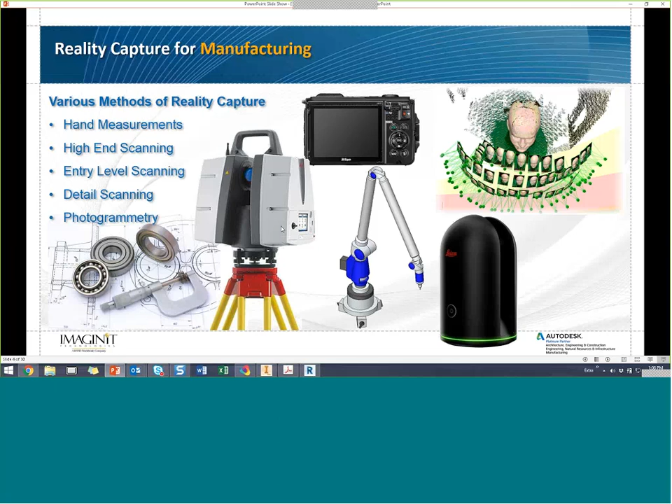So there's all types of methods of going out and capturing reality now. And the process that you choose really does become a factor of the company that you work for. How much can you afford for it? How much time do you have? How much skill or expertise do you want to designate towards this particular process? Well, I have a question for you. This is a question I ask a lot these days. Why has manufacturing been so slow in adopting reality capture?

I'll give you my take on that. Primarily, right off the bat, when I talk about manufacturers, the first question they ask me about laser scanning is how accurate is it? And then we start talking about time of flight and how long the laser is going to and from the object and how far the object is from the scanner, and we start talking about plus or minus a full millimeter at such a distance away from the scanner, and that just turns some manufacturers off right there. If it's not going to be 100% accurate, I don't want anything to do with it.

Well, nowadays, accuracy is amazing with laser scanners. It's never going to be 100% perfect. It never will be, but the accuracy is incredibly detailed now at objects that are roughly close to the scanner. The other side of it is time, skill, difficulty. Scanning, I think, has been perceived for a long time as a dedicated science. You need a surveyor to go out and read the instrument and to program it in correctly. And it has taken time in the past, putting people in the field for multiple days to collect data. It's not the case anymore.

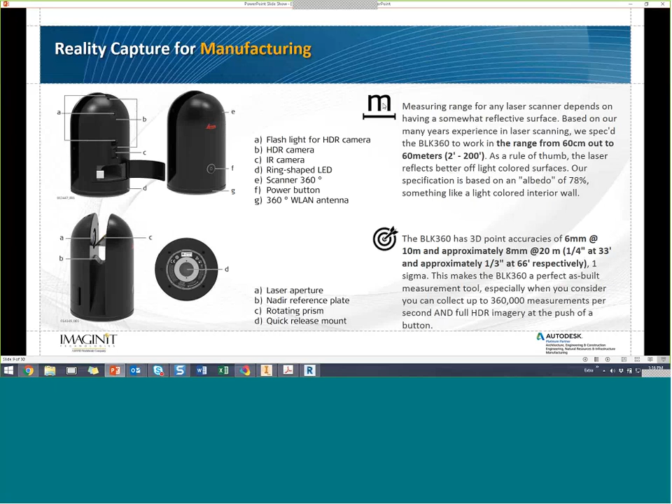But it basically sits on the top of a tripod or on the ground, and it spins around, takes a full 360-degree spherical image, and shoots the point clouds at about 360,000 points per second. Colors those points based on the spherical photo, and delivers you, I think, a very high-end point cloud scan in very little time. I'll mention this now, and it's probably on another slide, but at a medium density scan, this thing will complete a scan in right at 3 minutes.

Which is very nice for a scanner. I mentioned the price point is around $20,000. That is for the basic scanner. If you want to spend a couple of thousand dollars more, you can get the Mission Expansion Kit, which is the carry case, the tripod, the cover, the battery, extra batteries. Always great to go in the field with extra batteries.

So there are some additions, but this particular kit represents what we think goes in the field most of the time, every day with the BLK 360 product. This kit is small enough and light enough to carry through airport security. It easily goes in the overhead bin on an airplane.

I was at a customer site a couple of weeks ago where they have a full high-end, very expensive laser scanner. It's a construction firm. But they just got a few of these BLK 360s. Now, no one wants to touch the large scanner because it's so bulky and it takes so much time to get the thing into the field.

They want the quick and easy to use BLK 360 because it's so lightweight. They can throw it in the trunk of the rental car, go to the plant, take the scans, come back to the office, be back in the office the same day. So it really is breaking a lot of ground in the scanning industry.

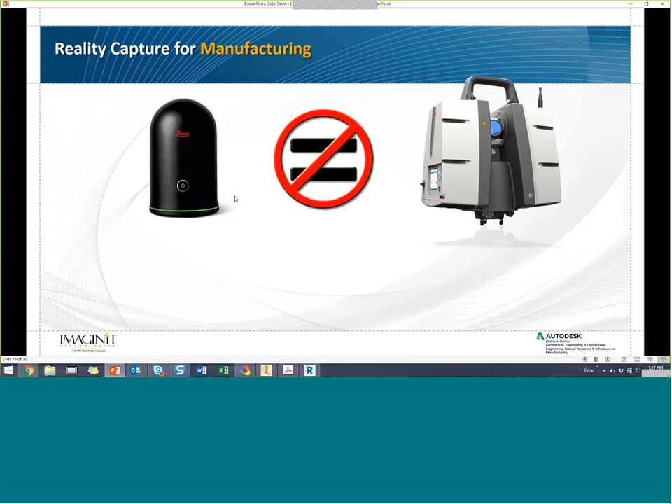Now listen, I absolutely need you to pay attention to this. These things are not equal. There's quality in the scan. You're going to see a much higher quality scan from the P series, the high-end scanners. The fidelity is going to be much greater. There'll be so many more options built on the high-end scanner.

The scans are great. They're reliable. They're roughly the same resolution. But there are a few issues. I'll be honest, the BLK has a hard time scanning very, very dark colors like black. It needs a good return from the color of the object you're scanning. So we don't get a good return on very dark objects like black objects. It's just the function of the laser and the power they put into the scanner.

So you want to take some care in investigating your process and choosing the correct scanner. But given the limited issues with the Leica, it's still a great first choice to get into reality capture. I think this is a great first scanner for any company to adopt and to get used to the reality capture workflows that are available in all design products, but specifically the Autodesk products.

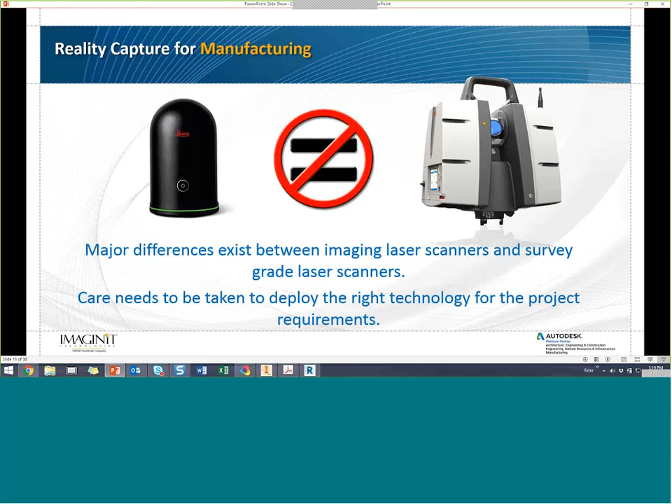The workflow with the BLK out of the box, you typically get an iPad. The iPad's not included in the price. You need an iPad Pro. And by the way, you don't need it, I'll show you another workflow in a moment where you don't need the iPad. But basically, the iPad Pro, the 12-inch or the 10-inch, has to be the Pro because that's the only iPad powerful enough to run the ReCap software.

The iPad hooks up via Wi-Fi to the scanner so that you can start the scan. So you don't have to be right in the way of the scanner to start it. There's only a single button to press if you want to press it manually. But the iPad starts the scan. It also registers the scans. As you start creating multiple scans, it automatically stitches them together for you. You can manually do registration, picking 3 points and aligning the scans yourself. But you don't have to. The iPad will do it for you.

Manual measurements, you can take quick measurements on site through the iPad. You can actually measure the cloud while it's on the iPad. And also we use it to transfer the data from the device to your desktop ReCap application. So you'll take your iPad back to the office, hook that up to your desktop, and transfer the data from the iPad to your computer.

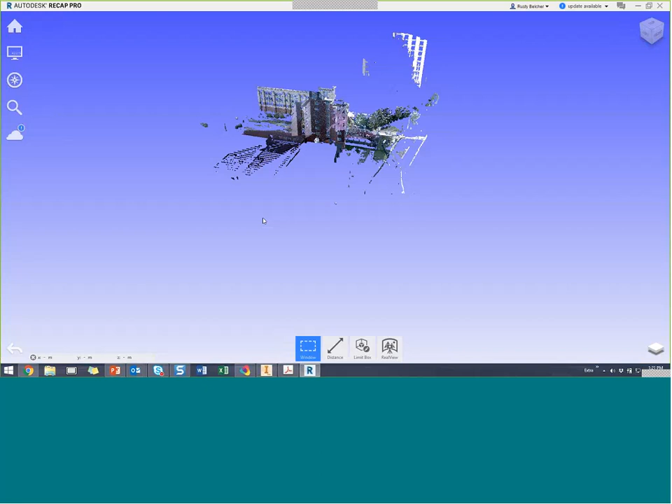I mentioned that I got a chance to take this thing home. I believe it was number 59 off of the product line, the 59th scanner that came off of the line, and we got a chance to use that. Jeff Bowers is one of our reality capture experts. He took me out on site, and I'll share with you real quick. I've got my ReCap application open here. This is the first scan Jeff did with me.

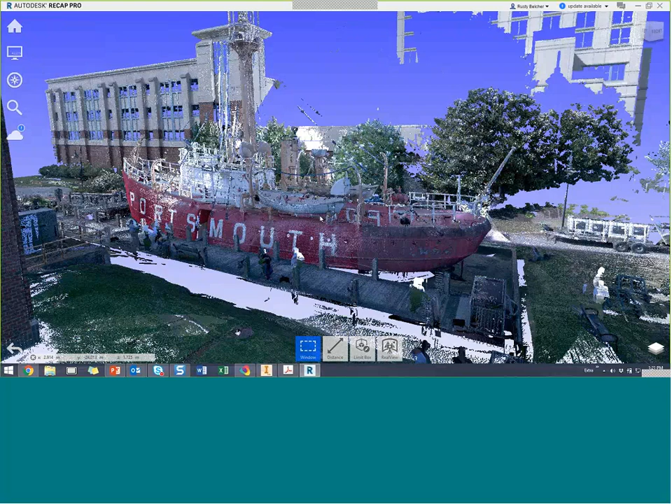I'm still a shipbuilder at heart. So I've got Autodesk ReCap here, and we went over to Portsmouth, Virginia, where there is a park right beside the river, and they have what's called a light ship. It used to be a floating lighthouse. It's a ship that was meant to put out into the bay and act as a lighthouse. It's kind of a famous light ship. It's actually a pretty nice one.

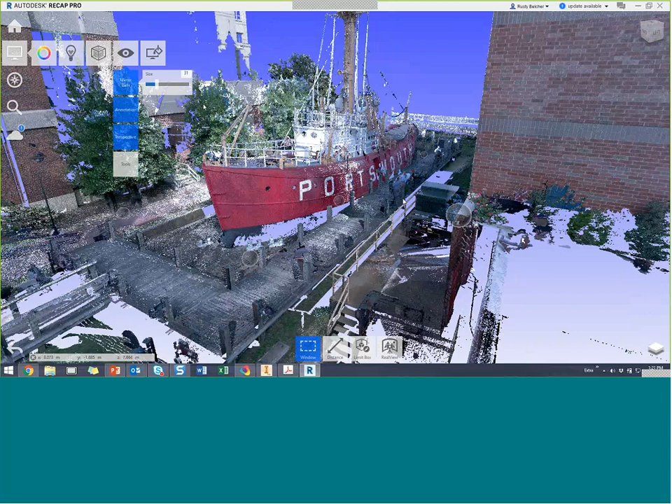But it's in a park right now, and it was a perfect scan for us to go out and practice. And you can see if I zoom out a little bit here, we turn on the mirror balls, you can actually see the river off in the background. If I jump in here, you can see basically what we had to look at that particular day.

I'm joking around where there's Jeff and me. This is how difficult scanning with the BLK is. The scanner does all the work. We're just sitting there minding our own business. There's the iPad, and there is the ship that we're scanning.

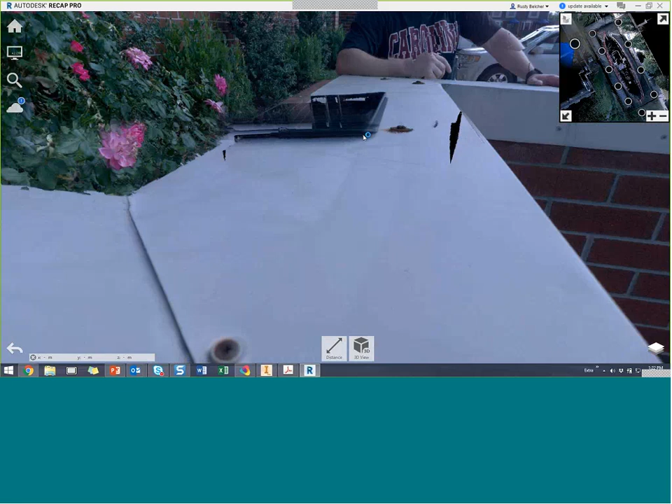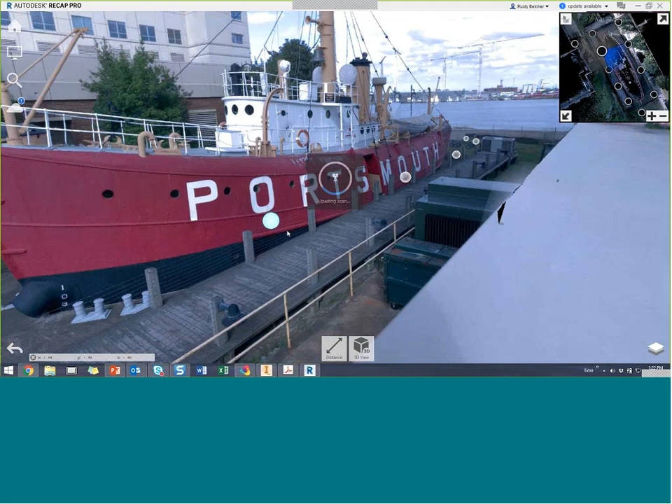Things that are really, really close to the iPad will start to duplicate on the image. That's just the function of things being too close to the device. But the further you get away, the more accurate the scan's going to be, again, up until about 60 feet away. So this is plenty of resolution for us to go out and grab the ship. And we can come in, and this is the very first time I ever got a chance to use it. And I was amazed at some of just the cool work we could do with this.

I'm in ReCap, and I'm just going to go up and grab a point snap. Let me grab a dimension and measure from one pipe to another pipe. So we can actually take measurements like that using the point snap tool. Really nice benefit, a nice little cool feature here. Being able to measure reality, being able to measure the distance between buildings, things like that, or the mechanical parts that you're looking to record for whatever purpose.

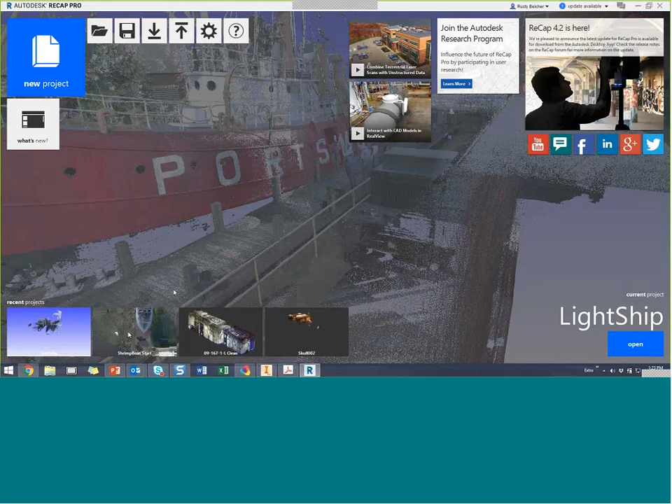So this is the first one Jeff taught me about. And then, believe it or not, he let me go home, and I scanned some stuff at home. I live pretty close to the bay, and there is a restaurant in my neighborhood. The restaurant's closed for the season, and the owner is working on a shrimp boat out behind the restaurant, right in the parking lot. And I got a chance to set up and scan the shrimp boat.

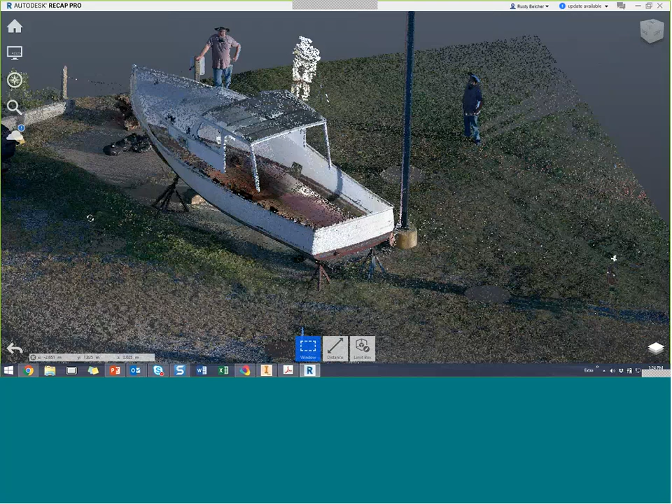This is the very first scan I ever did on my own, right after training. And the scan turned out really good. I was really surprised at the fidelity of the scan, how clean it was. And I'm going to jump over into Inventor for a minute, and the overall goal is to get this into your CAD software. In Inventor, it turned out really well.

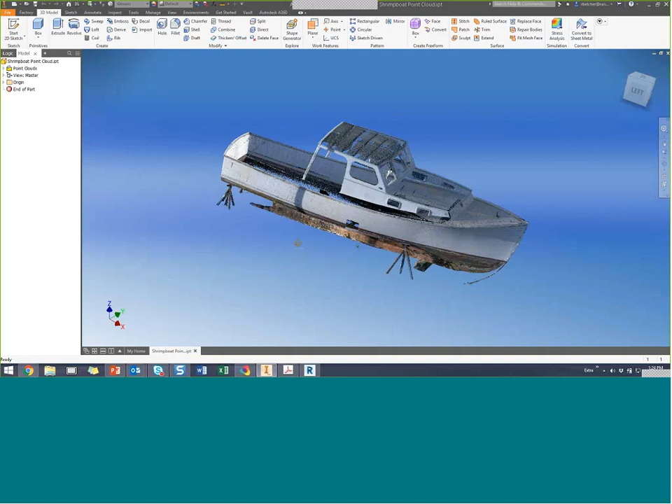The idea that you can capture reality and get it into your CAD system, what workflows does that open up for you? Well, in this particular case, I'm a shipbuilder at heart. I still focus on that a lot. Trying to develop the complex shape of the hull of the ship, I would need a bunch of splines in order to do that.

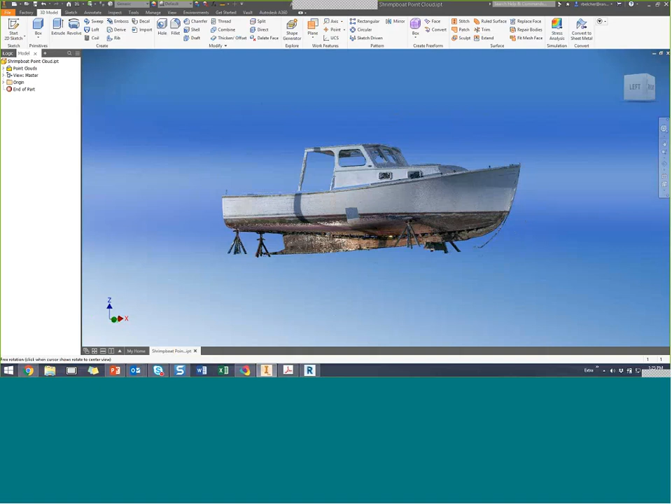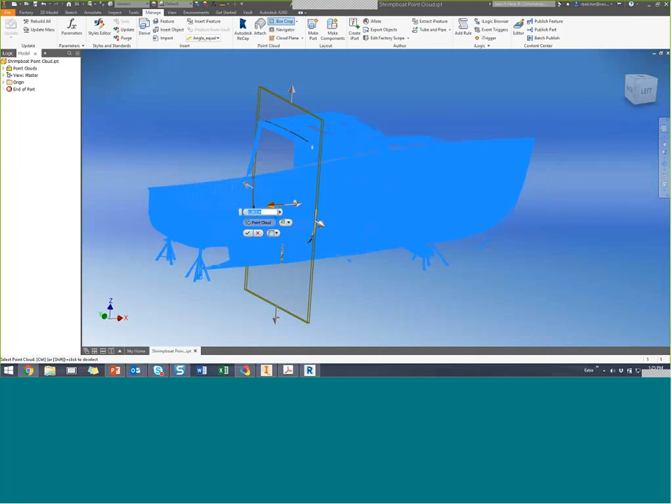Let's see. In Inventor, I could come into the Manage tab. Let me just go to the left side of the ship here, I should say boat. I'll do just a simple box crop. Now, I'm doing this as fast as I can because we only have an hour together. But I can take just a swath of points right through our design, click my check mark, and then I can look at that from the front, and there is the line that I need to trace in order to generate that hull. If I put a sketch plane there and crop out the boat, I now know what that hull looks like at that specific point.

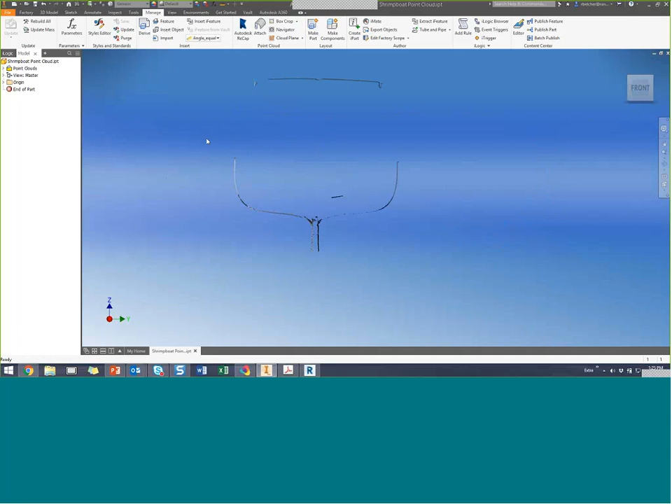Now, I'm doing this as fast as I can. Obviously, you want to take a bit more care, but that's how you can capture reality and put it in your computer for your use. Remember where I started this, when I was a kid back at Newport News Shipbuilding, all the work we went to to capture this line for a shell of a ship and to put it into a CAD system. Counting the scan time, it took about an hour to scan the ship, and it takes me just minutes to get this into Inventor. This is no trouble at all.

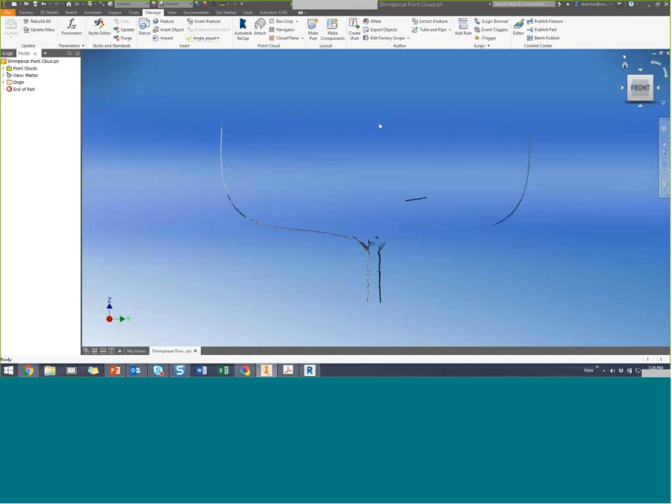It's amazing how far reality capture's come just in my career path, the time I've been using Inventor and AutoCAD. It's amazing what we can do with reality capture now.

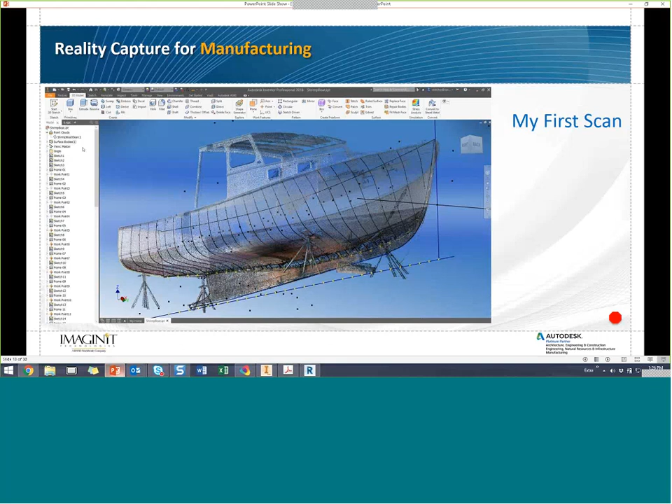I mentioned before that you do not need the iPad in order to generate laser scans with that BLK 360. If you just want to take the scanner, set it up, and press the button, it'll generate a Leica quality or a Leica-centric point cloud. It's a Leica proprietary point cloud. If you're invested in the Leica tools like Cyclone, JetStream, or CloudWorx, those scans go directly into those applications and they're fully supported. There's even other tools. There's registration tools that Leica has that can take all of those scans and help you register them and get them together oriented correctly so that you can use in your downstream applications.

If you're on the call and you're really not familiar with the Autodesk product line, in order to utilize the point clouds in Inventor or AutoCAD, you have to put them through Recap first. But again, if you're invested into the Leica tools, at the end of it, you can generate a cloud that was readable into Recap and then into Inventor.

I thought I'd talk a little bit about a few of the customers we've worked with. I'm not going to mention names, but I will mention some of the processes and some of the things I've gotten to scan just in the past half year with the Leica BLK 360. We offer what's called a Smart Start program. People who have already bought the scanner, they'll bring us in for usually 2 days. And during that 2 days, they'll take us out into their facility. They'll say, hey, we want to scan this. And we'll go through that first scan, just what Jeff did with me. He went through the first scan with me. We'll go through the first scan with you.

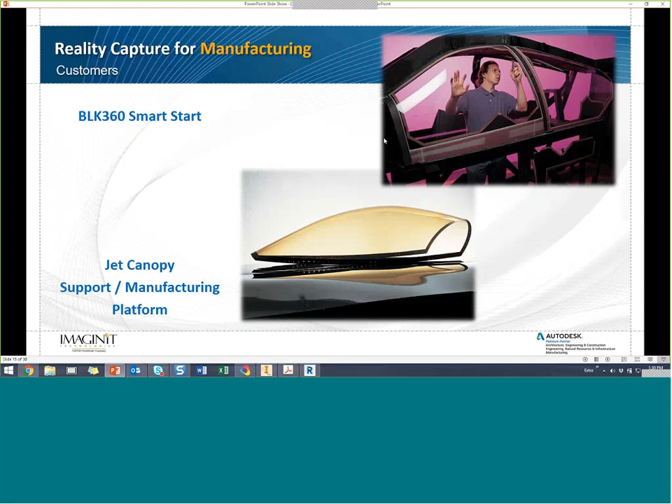We worked with a customer that creates jet canopies for fighter aircraft. We did not scan the canopy. The canopy is quite reflective. I don't think it would scan very well with the BLK. The high-end laser scanner would scan it just fine. It's a big difference between the two. But we scanned the mechanical jig that holds the canopy in place. We scanned the tool set for that and the jig itself, and it worked perfectly. That thing rolls around the facility. They wanted to scan what they call an asset so that as they move it from one part of the facility to the next part, they could actually assure that it would make it through the pathways and it would dock where it needed to dock for whatever process goes on that particular canopy.

We also do what's called a proof of concept with the scanner. This is for customers who are interested in the BLK, but they haven't bought one yet. So we have 2 scanners in our company. We'll show up with our scanner and basically do the same thing. Usually these are about 3 days of an engagement. Again, we go throughout your facility or your company. We scan what you want us to scan. We spend 3 days with you getting the data into Inventor, again, with me on the manufacturing side. Usually it's the Inventor application. And we talk about what are some of the workflows that are possible with the scanner. This way you get a chance to see it in action for yourself. You can see the fidelity of the scan, how it looks inside of the Inventor application before you commit to buying one.

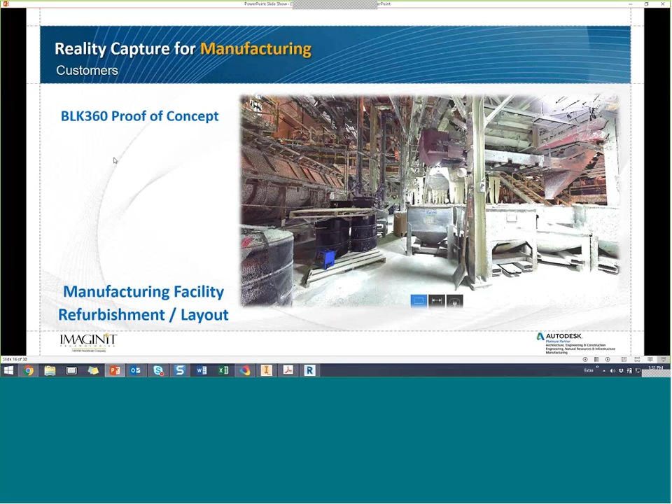We also have customers that are heavily into reverse engineering. Now, when it comes to reverse engineering, a lot of our customers have gone into the high-end scanner range for accuracy and fidelity. But several of them are looking at the BLK as a very quick and easy first pass for the scan. Once you get the point cloud, converting it to things like mesh or surface data is not available in the Inventor application. Recap doesn't do it. Inventor doesn't do it. Usually you'll need a third-party software if you want to convert a point cloud to a mesh. We've been working with a tool called 3D Reshaper for this. It does a fantastic job.

It also will convert the point cloud to a flat surface. Any flat in the cloud you can produce as a surface model. Very nice. You can trace the cloud with polylines. That's another feature that a lot of our customers want. They want to be able to quickly trace the cloud to usable 2D geometry.

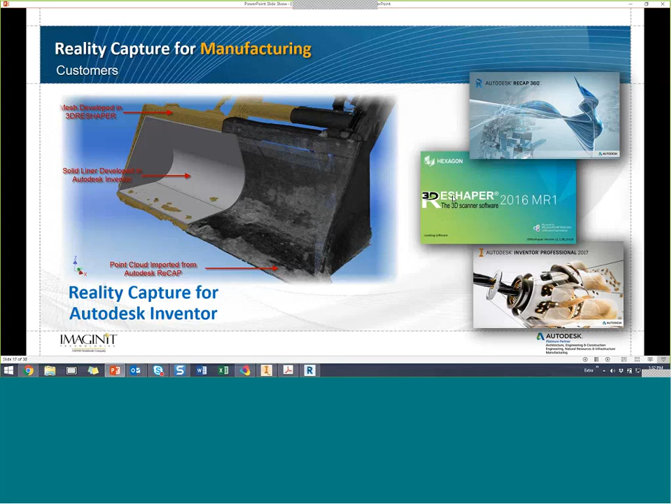So I usually use 3D Reshaper for that. That's my end. You might be on the Leica side where you're using CloudWorx to do basically the same thing. All of that is supported with that BLK 360 and the high-end P-Series scanners.

So I work a lot with the factory design utilities. I've been working with them since they first came out, and I look at the factory designers on the manufacturing side as the first people who really adopted point clouds on the manufacturing side as far as the Autodesk tools go.

I remember when point clouds first came out for the factory design utilities, we were very, very excited because we could now scan a facility and then we could lay out our factory line in context of reality. Not long after that, I was in a meeting with some people and we talked about, hey, why don't we just scan the equipment as well? And I can have point cloud assets, real world components that I can move from one cloud to the next and see how they fit in different buildings.

So the idea of scanning the factory, of course, is a big point as far as laser scanning goes. But scanning equipment and fixtures is something that's coming up more and more with our customer base in manufacturing.

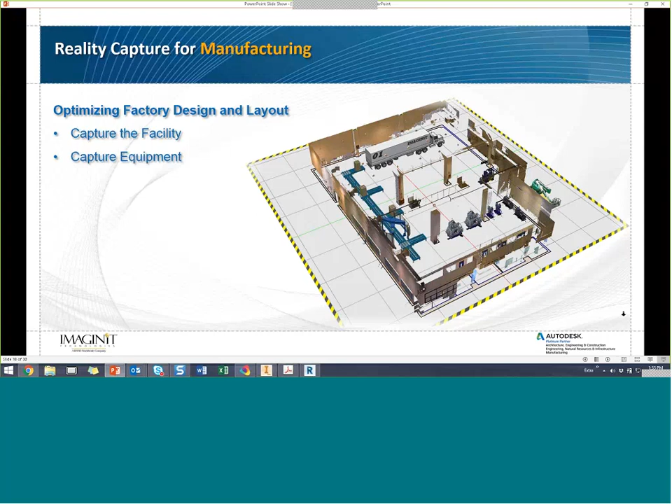Well, this idea leads you down a very unique possible workflow where instead of spending the time modeling a component, especially if you already have the machine, you might just go out and scan it with your scanner. And then you can combine your point cloud with 3D geometry so that it functions as your 3D model.

So if you have a machine and a scanner, you have 90% of the work done already to start doing document layout for putting that machine in the correct spot in a factory layout or a shop layout. The idea of using the point cloud as the model is something that's relatively new. If you haven't seen that, I'll give you a demonstration of that coming up.

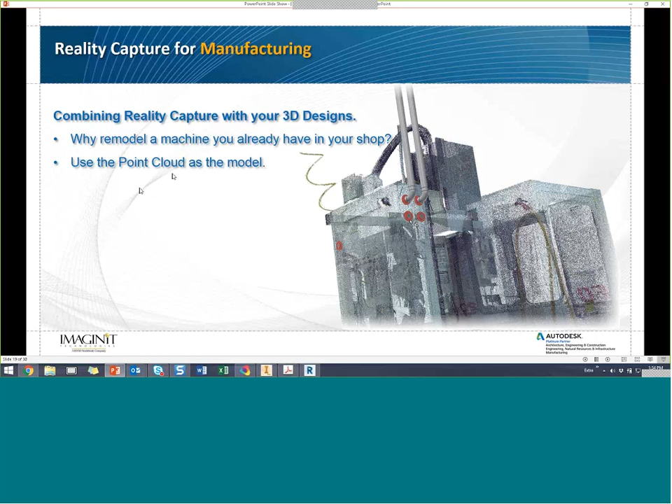And you might say, oh, well, I got to trace a point cloud. Oh, that's horrible. That'll take days. No, it won't. You'd be amazed how easy it is to trace an object if you have the 3D object up on your screen. You can put your point cloud into orthographic mode and trace away. It's very easy to do.

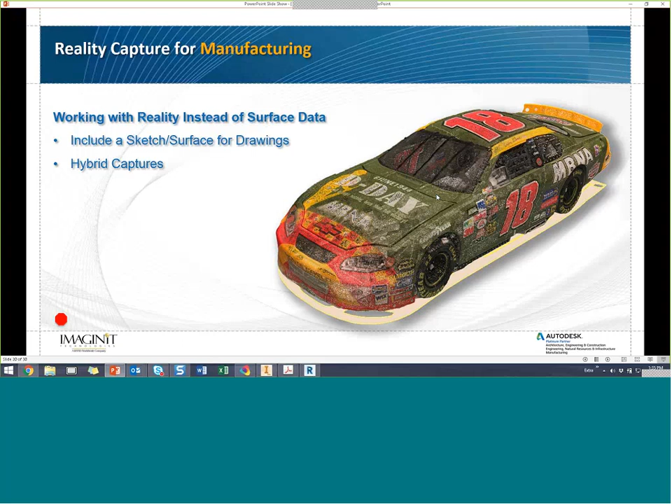So I'm going to jump into Inventor and just talk about that workflow for a moment. I'm going to use the factory utilities, but you wouldn't have to rely on these. You might be using SolidWorks or Pro-E, and they have workflows that would be similar to this as well.

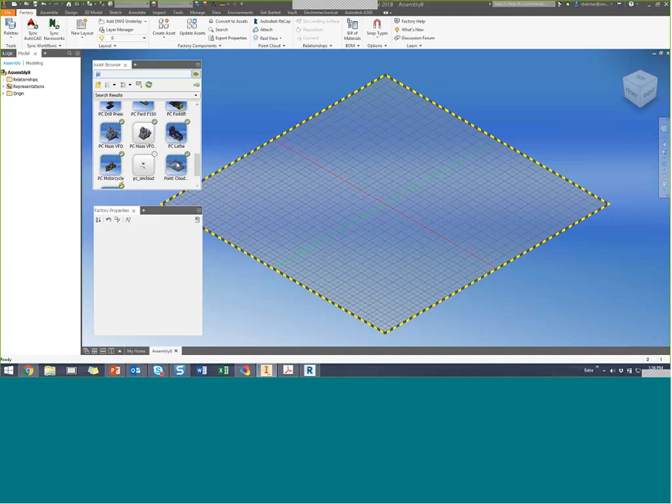But in the factory utilities, one of the things I have is access to a number of online assets. By the way, if you have the factory utilities and you want to try this yourself, just do a search on PC. PC for point cloud should return a number of point cloud assets for you. So I'm going to bring in a building. This is just a sample building I had.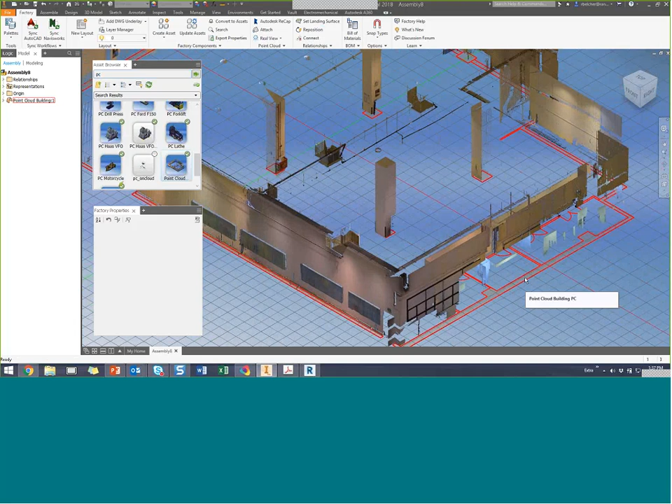And you can see real quickly, maybe you can see it or not, I've got the point cloud, and I went ahead and I traced the building. I knew what the offsets were for the walls. The scan is on the interior of the building, so I offset the wall thickness. Took about, I would say, 10 to 15 minutes to generate that 2D drawing. Again, it's easy to trace a building. Nothing very difficult about that.

Inside of this building, I'm going to add some machinery from another scan. That's what's so nice. I have another scan. I went on site to another building and I scanned some equipment. Now I want to see how this equipment would fit inside of this building. Well, I have the ability to save these pieces of equipment as assets.

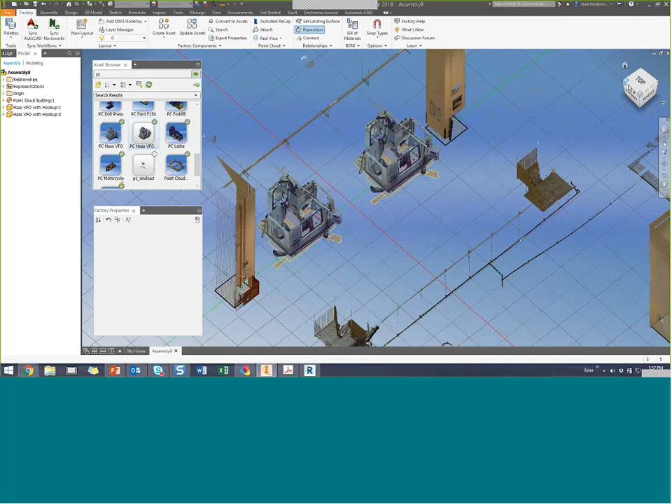I can look from the top and drag them around, and basically I'm going to place them by eye, but I could also place them numerically right in position where they need to go. So these are point cloud components, but a couple of things that I did to these components which I think is really nice. Working with point clouds is really nice with the tool.

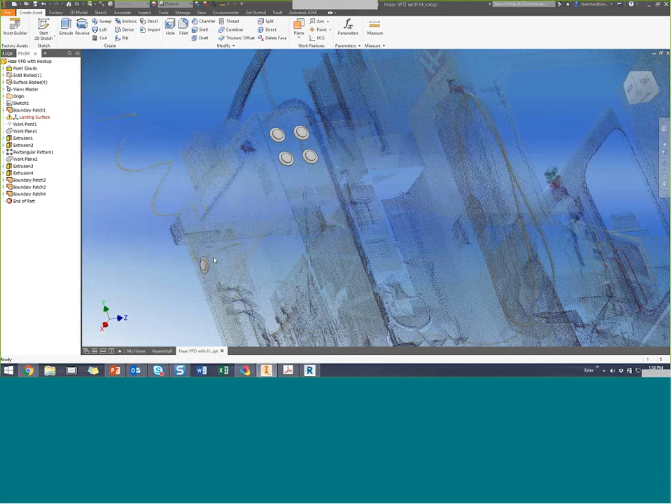I'm going to open one of these components. As far as the factory utilities go, this is not really a workflow I would use, but I want you to see it. I actually went in and modeled components, connectors for conduit. There's a lot of drops that support these machines. The drops have to come from the ceiling down for the electrical work and possibly for airflow, things like that.

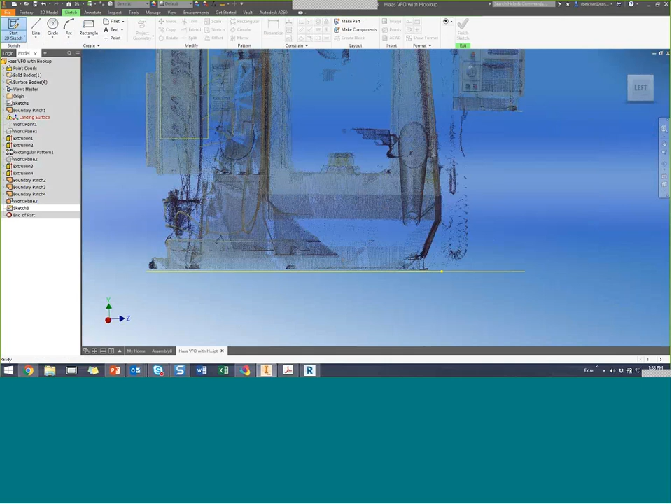But how do you draw on a 3D point cloud? Well, in Inventor, we do have tools that help you do that. On the Manage tab, we have tools like the Cloud Plane tool. So if I want to sketch on the side of this panel, I simply put a plane there, and then I can sketch on it. If there's a particular feature I want to add to the design, or I'm thinking about adding an extra control panel here, I can absolutely do that.

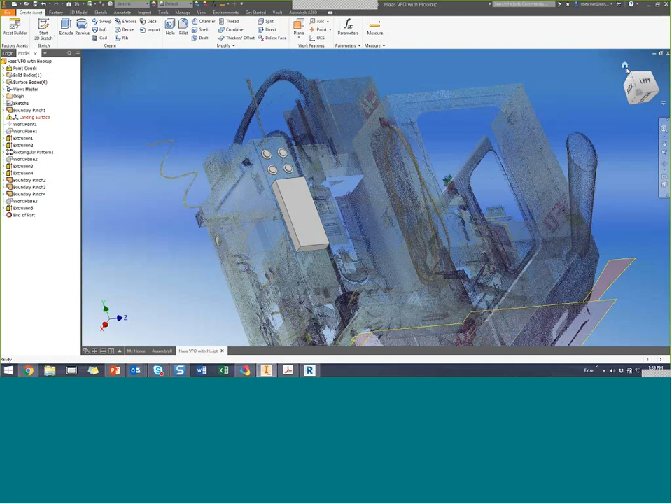And now I have what I call a hybrid design. I have a design that's half point cloud, half solid. Well, what does that buy me? Why would I want to add some 3D features to a point cloud? Well, remember what I said. I have to add drop data. I have to add conduit to this. So I'm going to ground this just so it doesn't move on me.

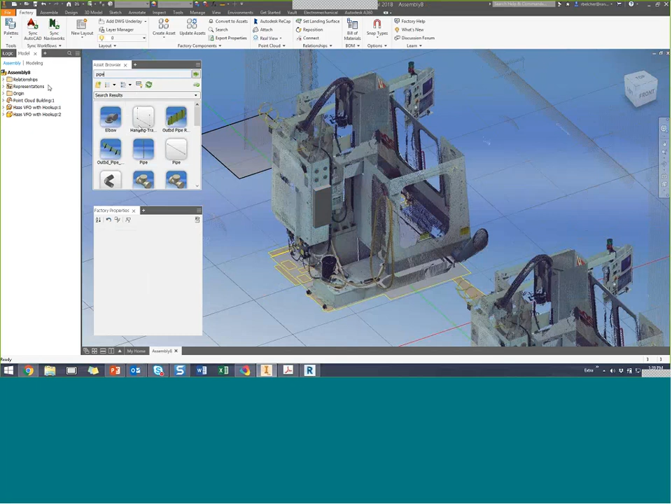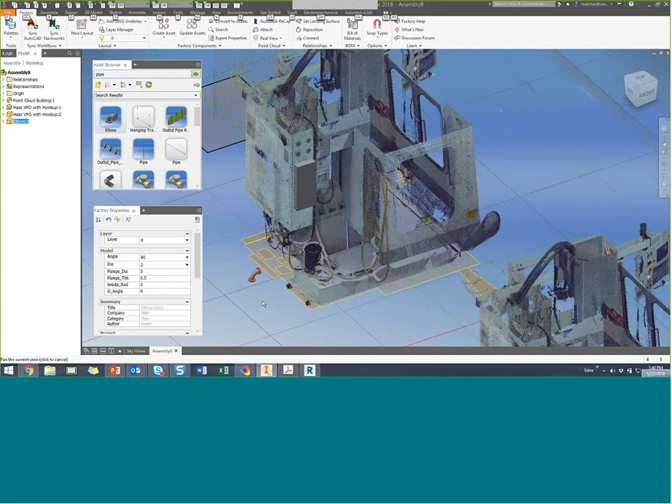And I'm going to look up for some pipe. I have a number of pipe assets available to me. This is an elbow that I generated. So if you have the factory utilities, you might not have this one. But this is a regular Inventor part, and I can use the constraint tools. Let me drag this around. Get it up here closer so I can see what I'm doing.

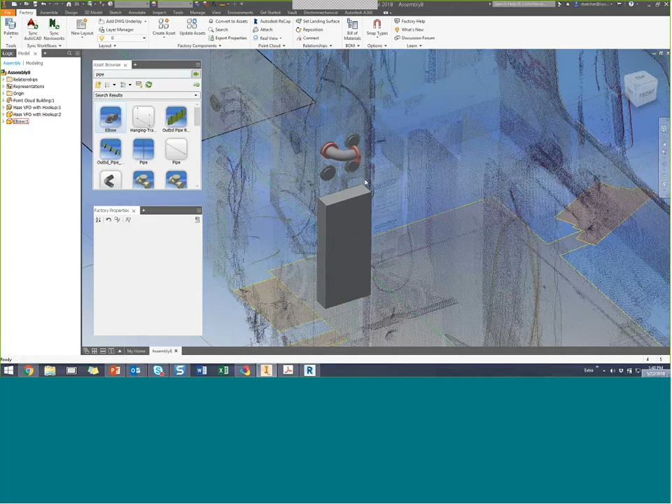There we go. And I can constrain that elbow right to the side of that panel. I'll go ahead and rock it around. Let me grab a piece of pipe here. Again, this is just conduit. Notice that the conduit will automatically resize to the elbow. And then I can simply select the parameter, 144 inches, for that to go up into the ceiling.

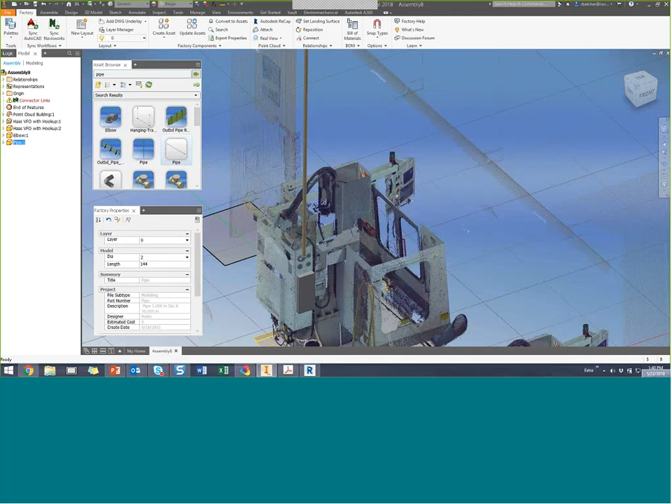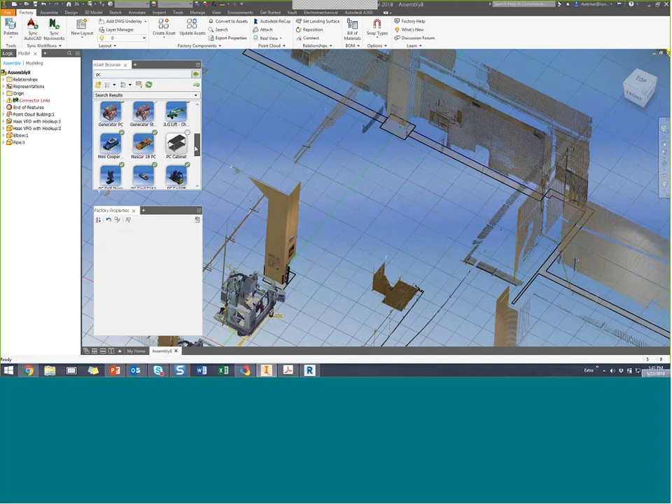So I have a solid model hooking right up to a point cloud model. I'm using the solid data to connect the two together to make it as versatile a design as possible. Well, let's carry that idea forward just a little bit more. Let me go back to my point cloud assets. Let's see. I've got a couple of lathes. We'll put them back here into the shop area. I've got a couple of drill presses. Can place those in here as well.

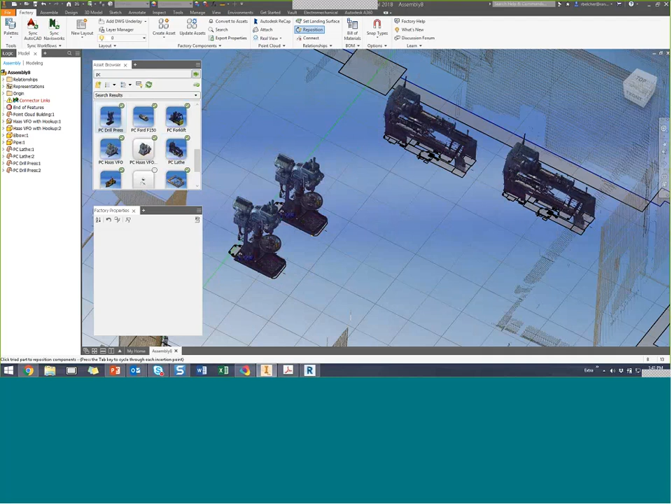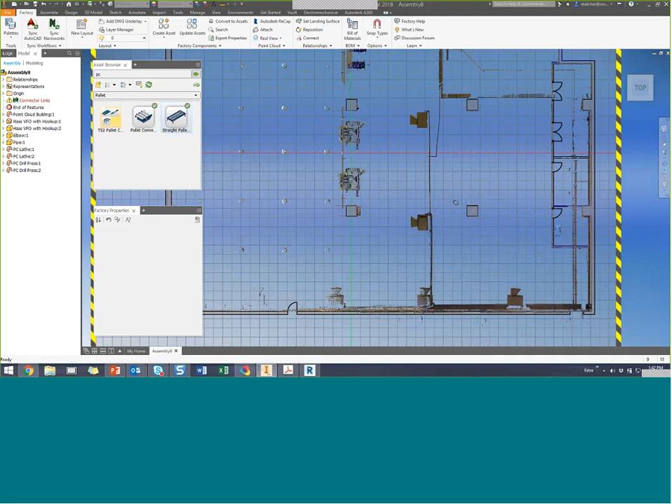Again, these are all reality capture scans that come from different scans, and I'm able to bring them all together in one environment, and I'm working with reality all the time. This is the factory utilities. If I want to come in and add a couple of conveyors, I can absolutely do that. If I have 3D models of conveyors, those are welcome. You can still use your conventional modeling designs. So I'll bring in a conveyor model here. I'll bring in a pallet turntable there.

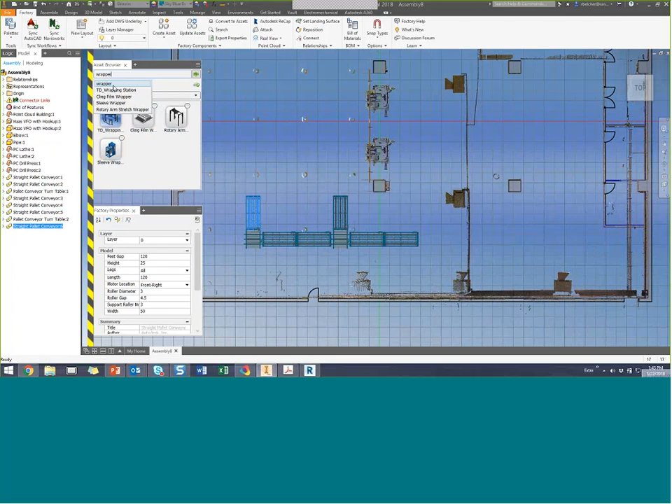If you guys have seen Factory Suite, I'm not going to drop a lot of these things in. I just want you to see how easy it is to do. And usually with this, there's a wrapper station. I'm going to wrap our parts in cellophane. This is a model I created a while ago for that. And we'll just place that up right here. So I know I've got room. I can place this right in context of the building.

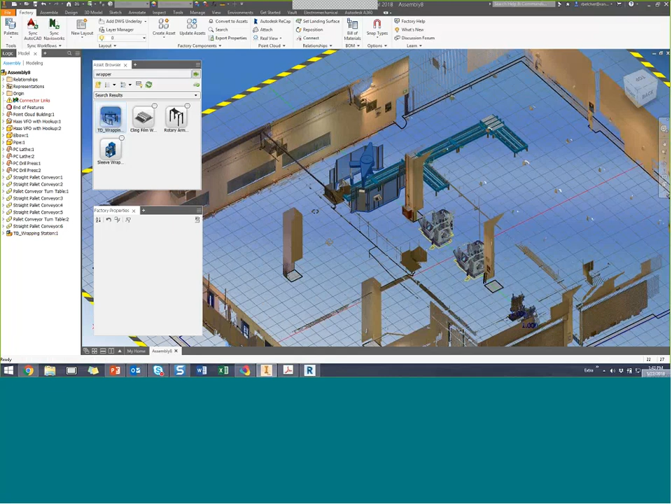There are ways with the factory utilities that we can run clash detection between the point clouds and the objects. That's a function of Navisworks, but it is a possibility. So I have a design here, pretty nice, and let me go ahead and save it. It's going to save it as a sample file.

And let me do something that might be a little unique for you guys. Let me generate a drawing. So I'm going to do the top view of this design. And notice, just in case you're wondering, I have surface bodies turned on.

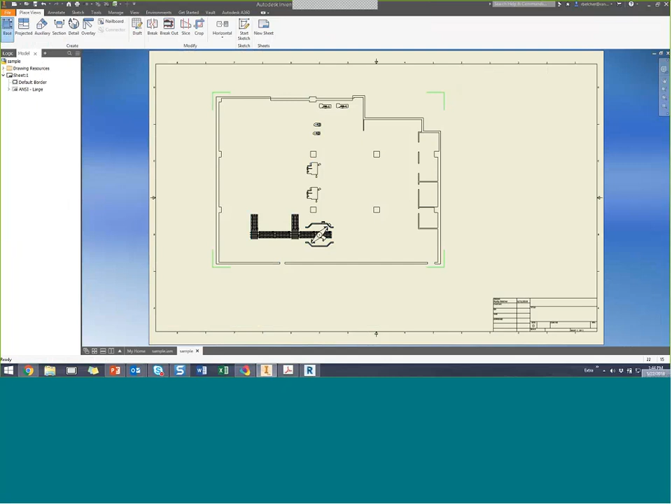So I'll click OK. And I'm generating a drawing of my building and all the machinery in here at the same time. It's really nice. I don't know if you guys have ever seen somebody in Inventor drawing views of point clouds.

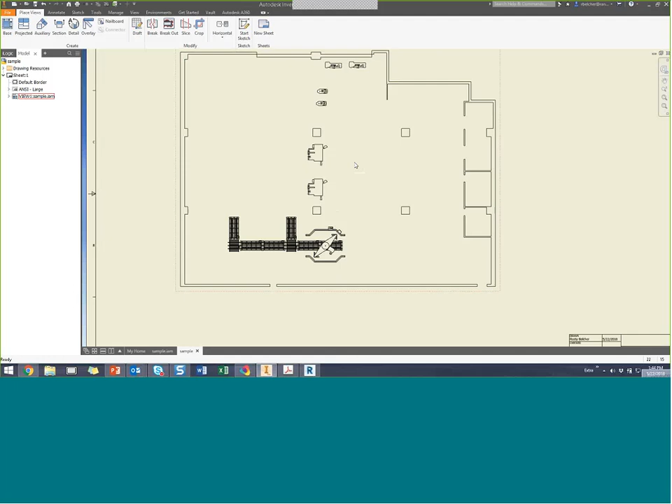Now, in each case, the point cloud has a sketch that's underneath of it, a little solid, a little surface body that's sitting there that represents the top view. I can only do this in the top view, but it generates the top view of the design for me. Very nice and effective. And of course, if I go into the scan and add some more data, my drawing will update. Let me go back to my PC.

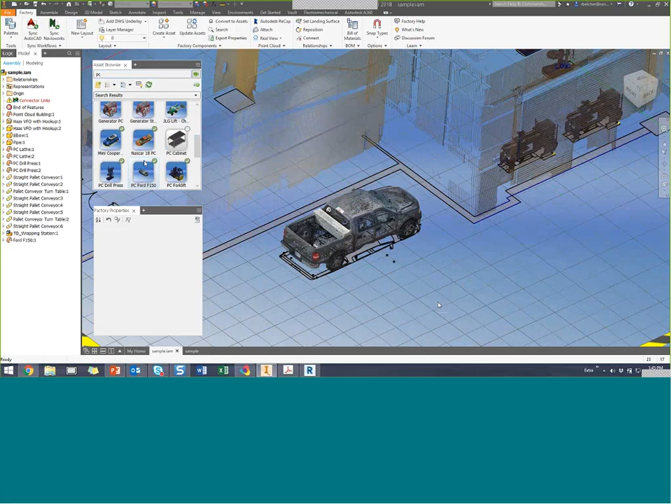And a couple of years ago at Autodesk University, I did a class about scanning my pickup truck. That's my pickup truck. And this is about 3 years old. I did that with photogrammetry. We'll talk about photogrammetry coming up. About a year later, I did my wife's Mini Cooper. And the photogrammetry tools, just in a year, did so much better than they did previously.

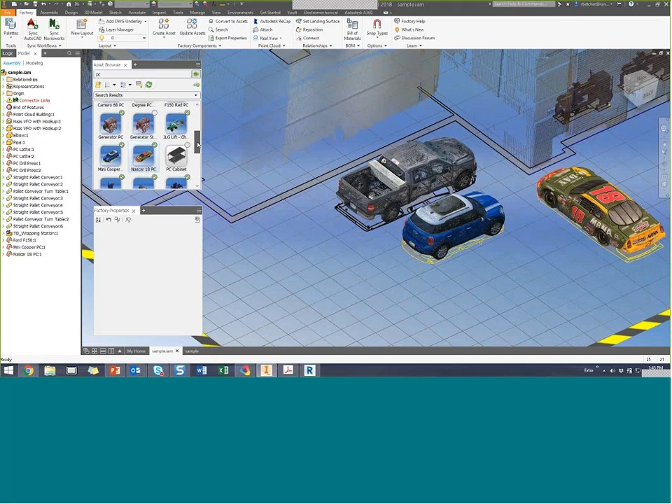I was able to generate, by the way, the little NASCAR component. This is a die-cast toy, sits on my desk, and I happened to scale it up. So it's about 8 inches long normally in reality, but I scaled it up full scale. So I did a photogrammetry scan of that. And how about this, the generator. This is one of the very first photogrammetry scans I ever did, putting this in the tail of the pickup truck.

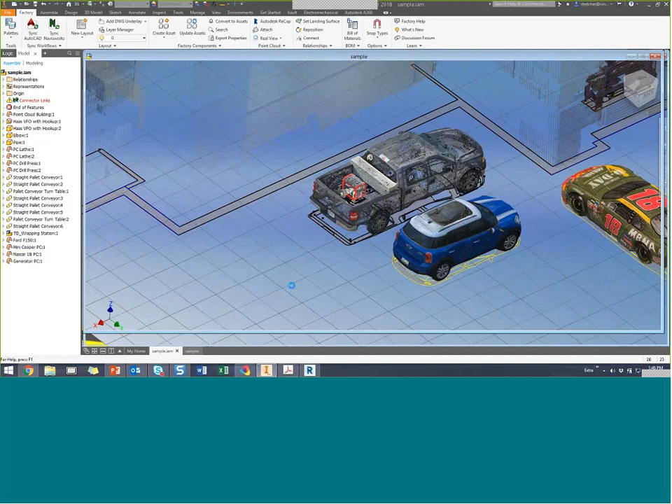So notice I'm working with real-world objects here. I'm not working with 3D models. I'm not working with surface data. But if I, of course, go back to my drawing, all of this information is going to be reflected. And things like, of course, your parts list. If I wanted to bring up the parts list, dock that there.

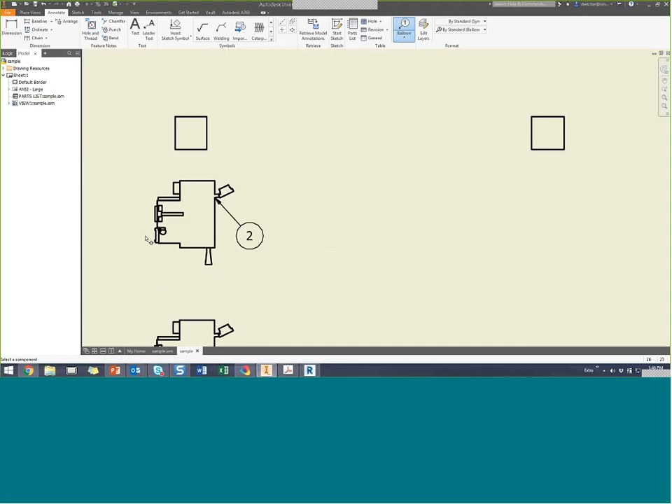Everything I've added to the design is listed, and of course I can document the building with balloons or the machines, even those pieces of pipe that are kind of difficult to see at the moment. We can document that as well. So this is a fully functional Inventor file. Does everything I think you'd expect it to do, but we're looking at reality capture data here.

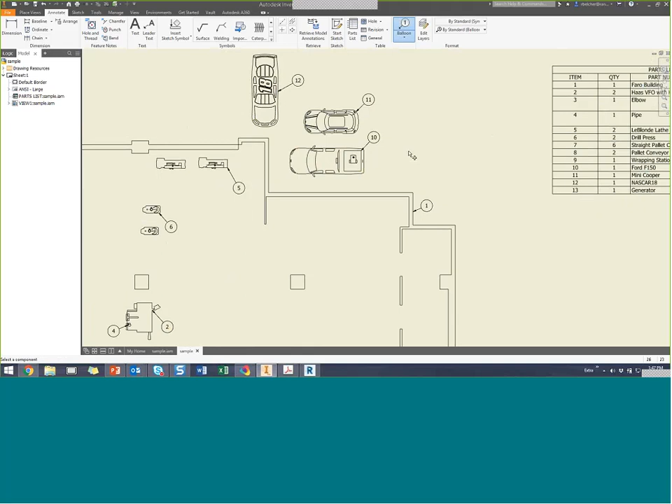So reality capture is fully integrated into the product design collection tools. Navisworks supports point clouds, AutoCAD supports point clouds, Inventor certainly supports them, and the workflows you have available at this point are just phenomenal. Now, I mentioned photogrammetry, so I'm going to finish up on this particular topic.

A couple of years ago, actually about a year and a half ago, somebody approached our company and they said, is it possible for me to generate a custom face component, a mask? I need to create those based on scans of a real person's face. And I want to start off with a video. And at first, when they asked me that question, I was relatively new to the reality capture team at the time. I was a little skeptical. I didn't know if we could do that.

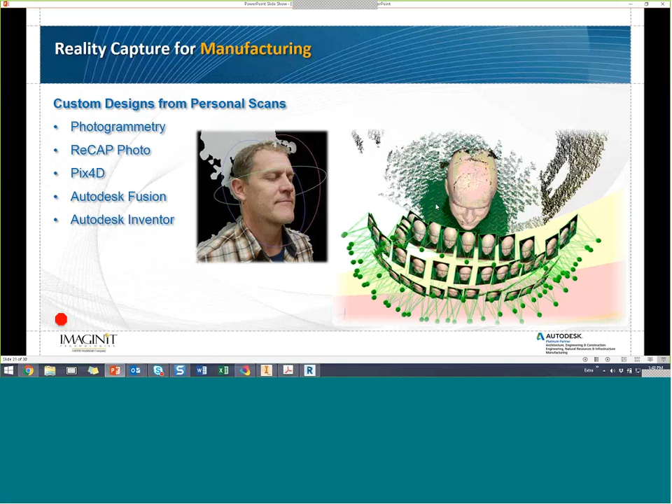But we have a tool called Pix4D that allows you to do photogrammetry from a video, and it works very well. And through that particular tool and a couple of other tools, we were able to develop a custom workflow for this customer that proved the concept was possible. The original scan you see here, it looks like our poor guy has oatmeal all over himself, but that's the artifacts of the video. We're able to filter those out through a tool called ReCap Pro. Oh, I'm sorry, ReCap Photo. I need to make sure I call it the correct thing now. They just changed the name of it.

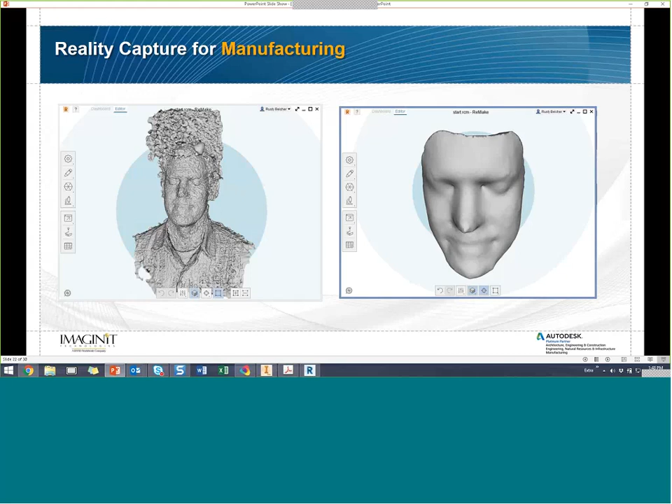ReCap Photo allows us to take mesh data. This is a mesh, comes from the scan. It allows us to smooth it out and solve it for what I call a watertight mesh. You can take the watertight mesh into Fusion. Autodesk Fusion is Autodesk's manufacturing software of the future, and they have an export utility from the ReCap Photo tool that sends this over as what's called a quad mesh. The quad mesh goes into the freeform environment and is turned into a solid component.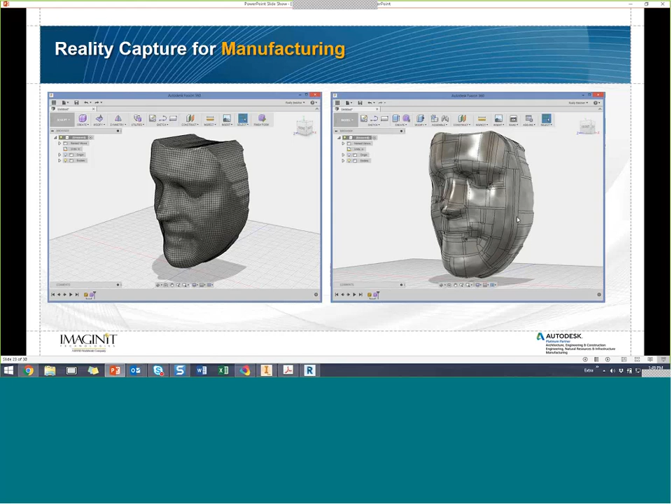So this workflow produces a solid part of a person's face. Now, once you have a solid part of a person's face, you go get the mask or whatever mask you want to deal with, generate the profile, and do an intersection curve between the person's face and the profile of the mask. And then you can generate a custom seal.

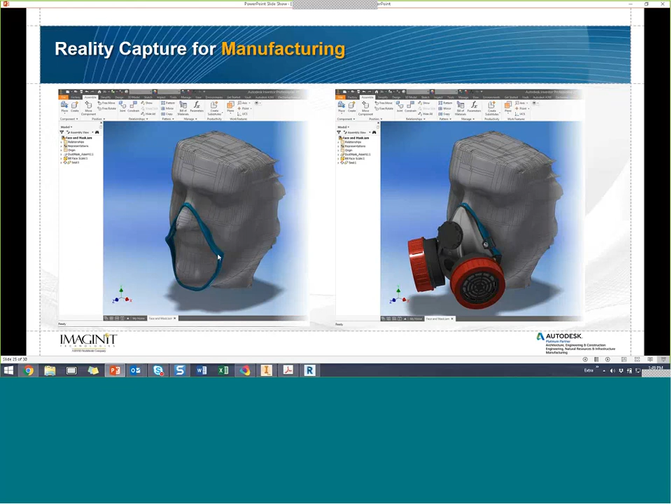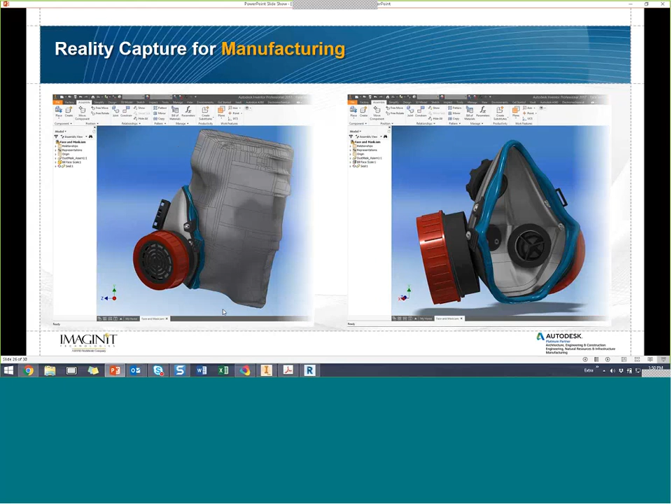The custom seal has an attachment to the mask, and it also follows the contour of the person's face. This worked. I thought it worked extremely well. In Inventor, I'll just open up real quickly this particular project.

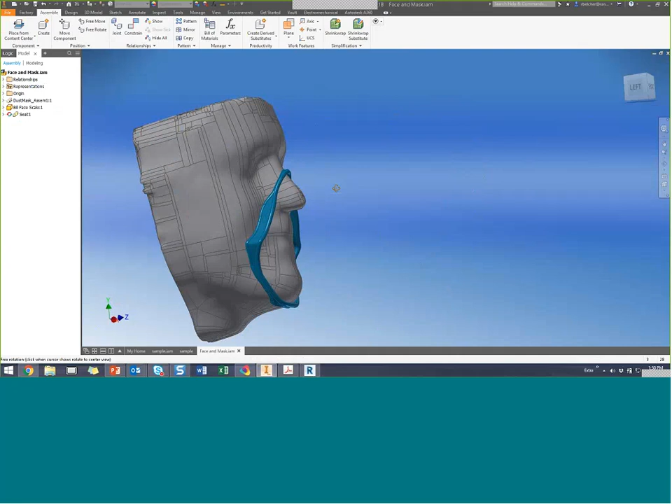We were able to generate the person's face from a video scan, and you saw the process through Fusion. We were able to generate a solid piece of data. You could also generate surfaces if you want, but I think solids are a little easier to work with in Inventor. And we took the profile of the mask. We did an intersection surface, and we generated a solid body based on those intersection lines.

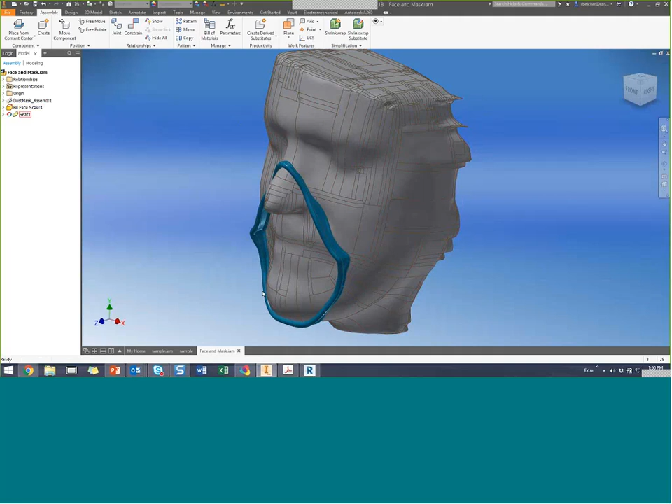So the proof of concept actually worked out really well, much better than I thought. And yes, I'm jumping from one application to another, but that's what our company does. We look for workflows to solve people's problems. And a lot of times that workflow is going to go from one application that does something really well to another application that does something really well. That's one of the things we do at IMAGINiT.

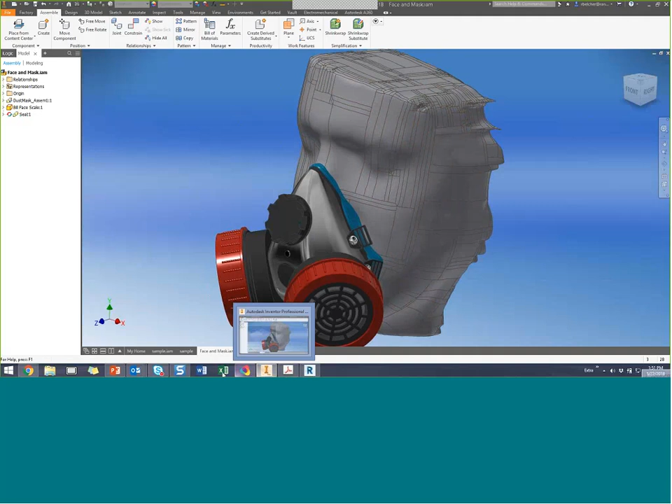I'll point out here that everything we did in this process was documentable. Everything we did produced drawings that you see on the side of the sheet. Of course, I think this would be more along the lines of a 3D print or some kind of unique manufacturing process like 3D printing to produce this part, but you can produce it in classic terms as well.

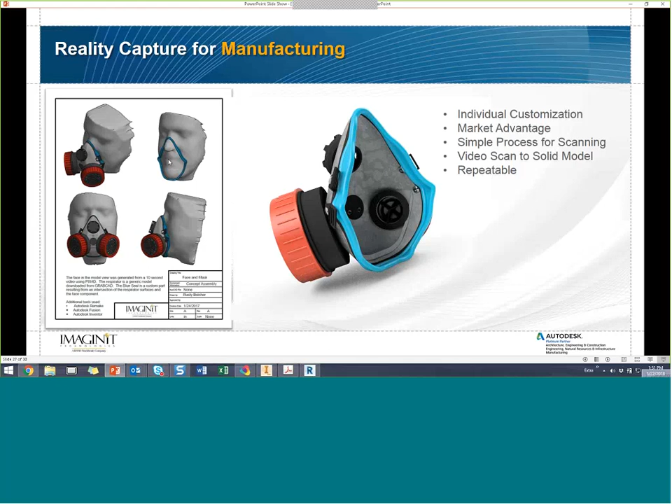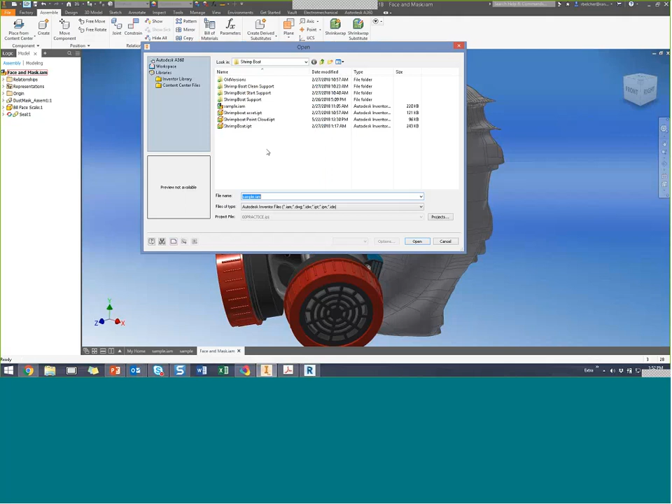Again, I'm going to finish up that this workflow, the photogrammetry workflow, allows us to deal with shapes we have never been able to deal with inside of tools like Inventor before. Human form is now easy to copy and get into your application. I'll just open up, again, if I go back to my home area, let me open up a design. Here is a design. I know it looks very anatomically correct, and it looks like something that you would see in a medical magazine.

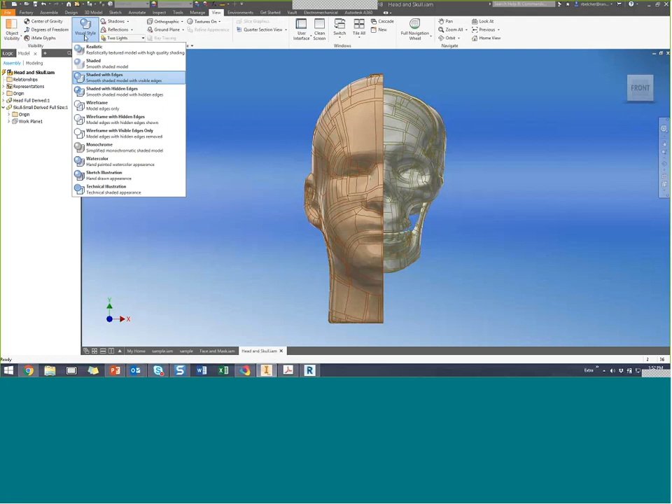Don't tell anybody I told you this, but that's really a styrofoam wig mannequin head. I scanned that, and it's also a Halloween decoration of a skull and the jaw of the skull. And if I just go to shaded mode and I turn on my shadows, you're looking at Inventor models that have been impossible to create up until this point.

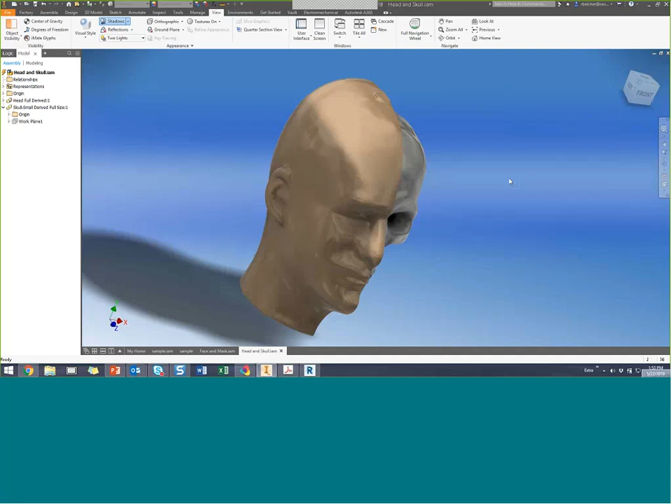But now that we can harvest reality and bring it into Inventor, the number of workflows that open up to us are just incredible. And as manufacturers, you can't afford to ignore the potential of adopting reality capture into your current workflows and practices. It's affordable now. It's easy to access. It's now, I like the word democratized. Everyone can do it. So if you haven't investigated what reality capture can bring to your table, now's the time to reconsider that because it's never been as easy or as profitable to introduce that process to your workflow.

You guys have seen a lot of the applications of this already. Several of us have ordered our own custom earbuds based on the scan of our own ear. Yes, they cost a little bit more than the normal earbud, but you pay to have that because it's yours, it's unique to you. I mentioned the respiratory masks and the CPAP masks, the idea of being able to generate those. Safety equipment like headbands or visors. Imagine if you're going to go deep sea diving, how much more would you pay for a mask that's custom fit to your face and your profile?

Sporting equipment: NASCAR has been scanning their drivers for a long time and generating custom seats that are form fit, created and manufactured per driver. I mentioned the canopies earlier. Those canopies for jet aircraft are custom fit to the pilot. The asset collection is also something that people do in video games for virtual reality. I'm not going to chase that down, but this is a very popular topic if you're into the world of VR and being able to go out and scan reality instead of modeling it and then putting that into your video game. So those are all popular workflows that use this particular technique.